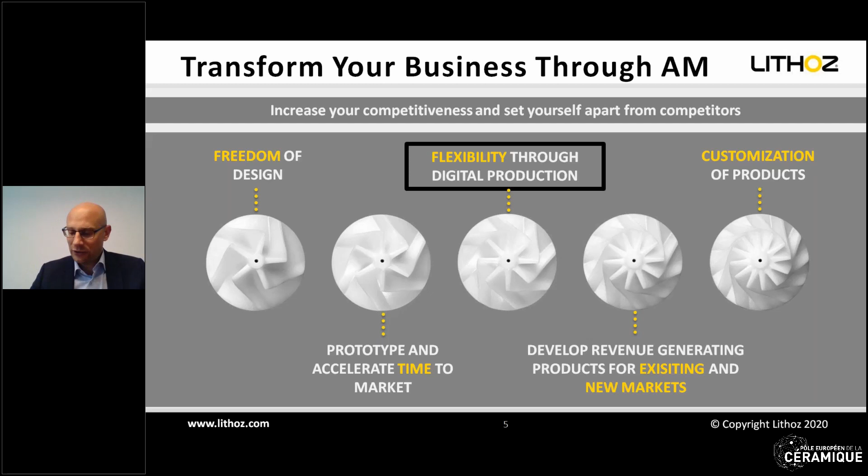When does it make sense to use additive manufacturing? I'll summarize a little bit what I've said, but go into more detail on these 3 effects, which I think are important for additive manufacturing. Here, what we see, of course, is well known.

Again, this is just a simplification. If we have injection molding, the prices go down immediately with the number of parts. So basically what we see, there's a break-even point, and additive manufacturing, in this simplification, is always the same price per part - it's not totally right, but should be okay for this. What we see on the left-hand side is additive manufacturing is more economical, and at a certain number of parts, injection molding becomes more economical. So this is what we currently see, that people are shifting from injection molding to additive manufacturing if the lot sizes are rather small. Sometimes they have to order parts for 3, 4, 5 years and cannot change anything, so they think they can do something with additive manufacturing.

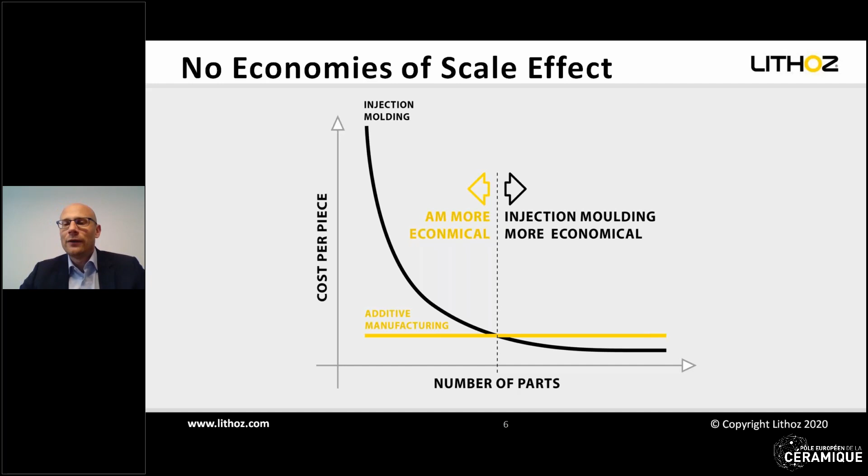And especially in the medical device industry, this has shown that it works out very well. Our customers are already in production with lot sizes of a couple of thousand up to more than 10,000 parts per year with this technology. So you see, additive manufacturing is already in serial production.

Another effect we see, I would call it the complexity for free effect - again, a simplification. We see with injection molding, the more complex a part gets, the more complex the tool will be, and hence the price goes up.

For additive manufacturing, complexity is more or less for free, so the complexity has no effect on the price. Again, we see here a break-even where there's a certain complexity where it makes sense to really use additive manufacturing also in large quantities. Of course, this is never independent from the lot size, but as a simplification, it shows that there is some area where additive manufacturing is even more economical once the complexity has come up.

So this is the easiest thing, these are those things which already are here. But much more interesting is this asymptote on the right-hand side of your screen, because what does it mean? A certain complexity cannot be produced by injection molding or by conventional forming technology, and this is actually the big blue ocean for additive manufacturing.

This is what I think the future of additive manufacturing holds, although it's hard to think about things which are not existing yet. But we already see these kind of things coming up, where you just add some functionality to the parts, and they give you much more value than the costs of the printing. So this is something which will be much more interesting in the future as well.

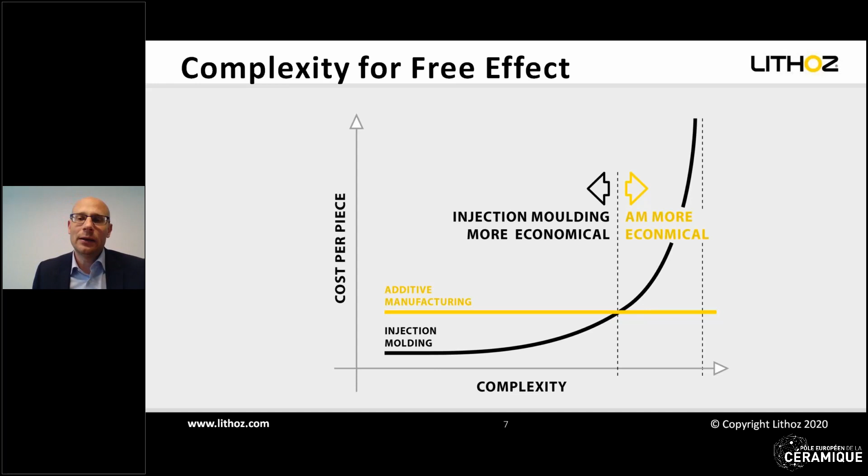And a very simple thing: size matters in additive manufacturing, and in that case, the smaller the better. Why is it better? Because we are working in parallel, so we can make all parts in parallel, and if you need to make it bigger, if the height is very, very long, it takes just a lot of time.

Here you see, for example, two casting cores which have been compared. One is a big one with 27 centimeters in height, and it takes about 27 hours to print this part. But if we go to the smaller cores, we can print 30 cores at once. They are, of course, also smaller in height, 73 millimeters, and the build time per part is then 14 minutes. So what you see is that the smaller the parts, the better it is suited for additive manufacturing, because here we have an effect which is different to conventional forming technologies.

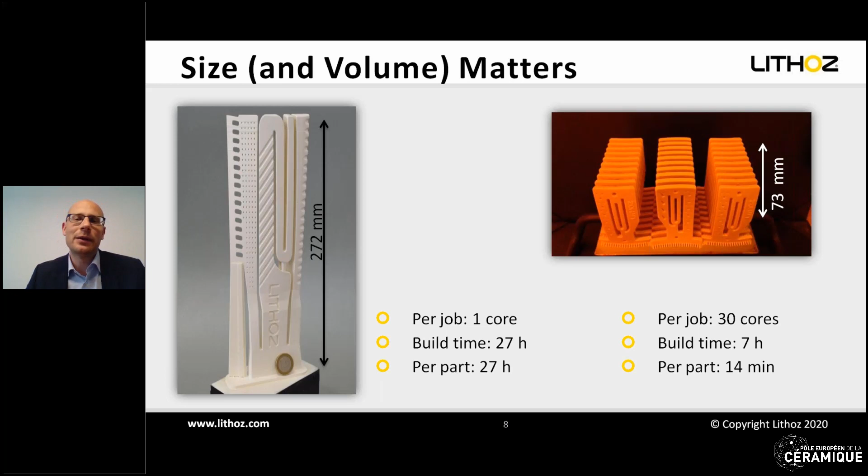Here, the less material you're using, the better it is for the price. So this was a general introduction into additive manufacturing, to give you a little bit of an idea of what you can do and where you should use it.

And now I want to step in to introduce you to our LCM technology. LCM stands for lithography-based ceramic manufacturing, which means basically that we are using light to structure. How does it work? Basically, for all those who are ceramics experts, and I think most of you are in this webinar, our technology is a two-step process.

So we start with a CAD design, then we print it, and usually then all, or most, of the additive manufacturing technologies are more or less finished. But since we are working with ceramics, we need a post-processing, a thermal post-processing, which means we need to debind and sinter the parts to achieve the final product. So this, again, is for me one of the reasons why we can achieve these good mechanical properties, because we have this two-stage approach, which is the normal way of treating ceramic parts.

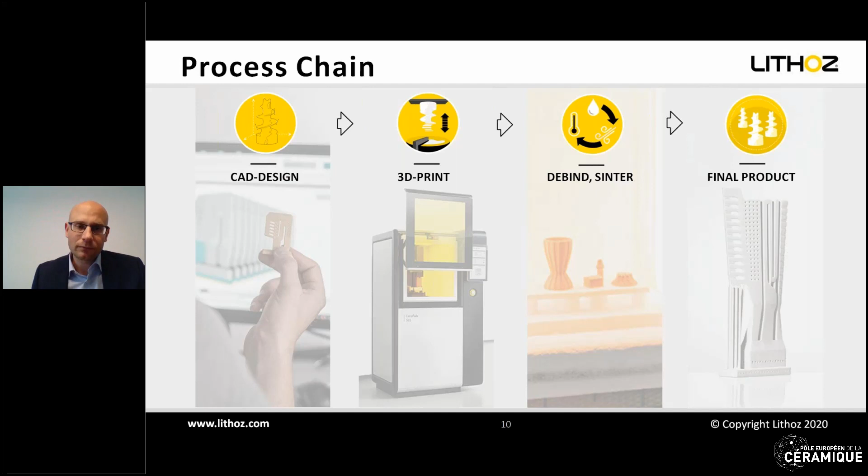How does the technology basically work? You can find a lot of explanation videos on YouTube or on our website, but let me show you very briefly how it works. On the left side, you see an insight into the machine. We have a ceramic material, a ceramic slurry in a vat, and the parts are drawn out of the vat.

As you can see on the schematic picture on the right hand, there is an optical system underneath the vat, and if you expose from underneath, the light hits the material. Where the light hits the material, it solidifies, and then you build up the part layer by layer, as with any conventional forming technology. The advantage of this upside-down approach is that you can make very, very fine details and very thin layers. So basically, when you build up from upside down, you have no contact between the blade and the part, and therefore it's unlikely that you destroy the part with the blade, which can happen if you expose sometimes from the top.

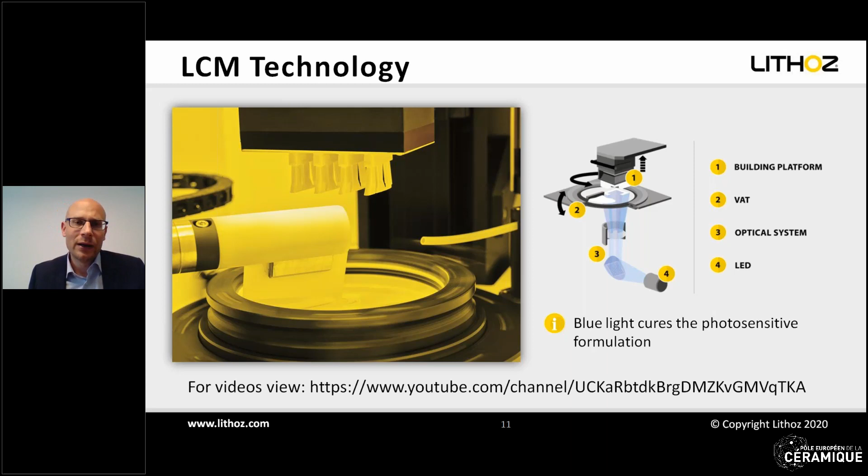This is clear - I don't know if you recognize this person in the back, but you see how it shrinks in this process. So, we start with the binder and the ceramic particles, then you burn off the binder, and then the part shrinks and gets the final ceramic properties. But this, as you can see here, is as with any conventional ceramic forming technology.

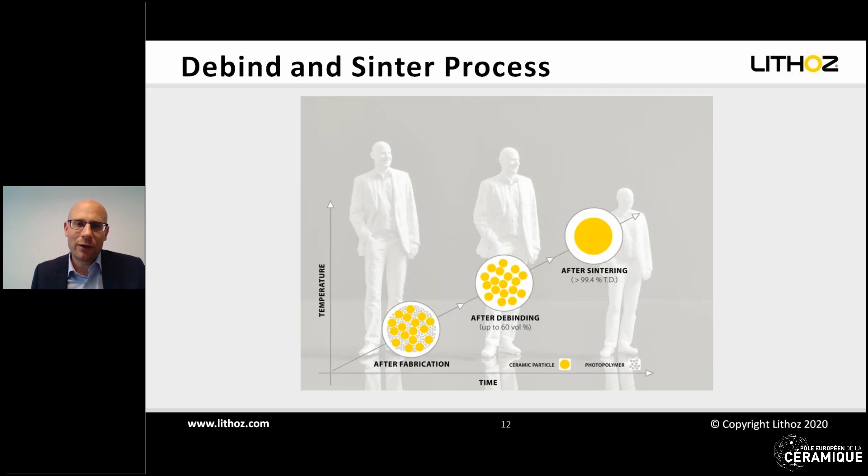Here you see our different systems which we provide at the moment. Our first generation was the CeraFab 7500. Here we have also a dental model, taking into account all those issues which come from medical application. Then the next generation is our CeraFab System, where we have different building envelopes, and it's also a modular design, so you can stack up to 4 machines into one unit to increase your productivity.

Because our approach is, and with all the people we talk to in additive manufacturing, from metals and from plastics, they all have the same opinion: to use multiple machines rather than one big machine, to keep the flexibility and to really make use of this parallel approach. I don't want to go into details about the differences between these machines - you can check it out on the internet, or contact us if you have any questions.

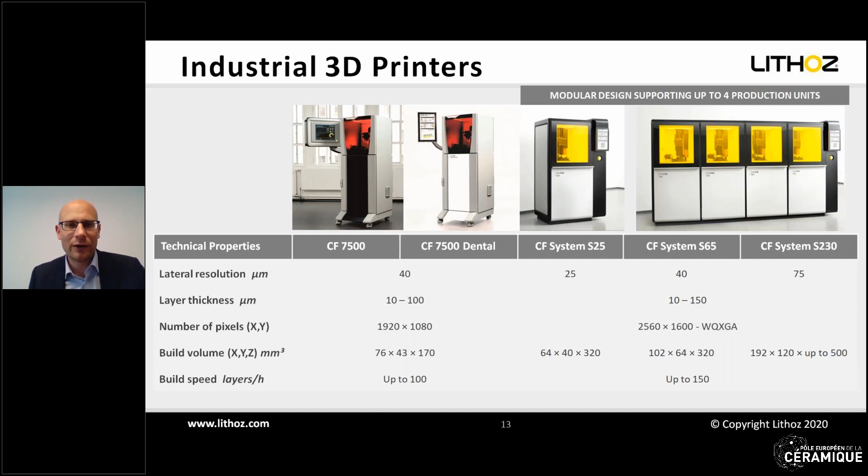What about productivity? Is additive manufacturing really capable of serial production? As I already told you, yes, it is. Our customers are already in serial production.

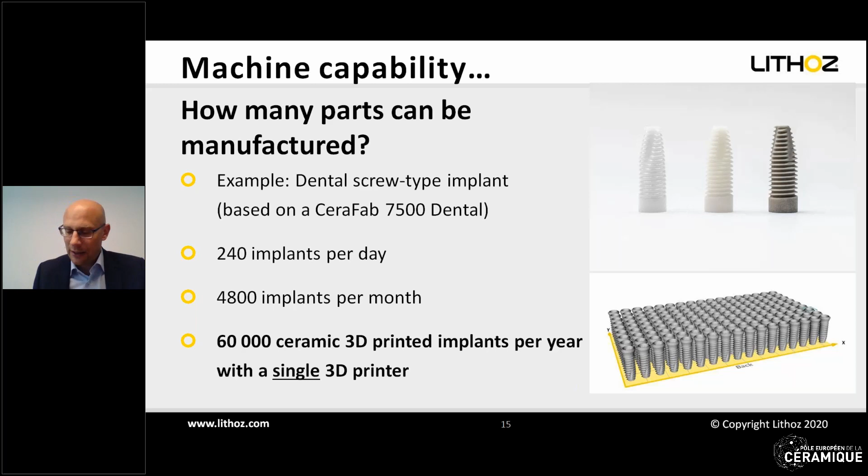Here I want to show you a part with dental implants. It's even on the small machine, so to say, on the CeraFab 7500 Dental. Here you can produce 240 implants per day, which means 60,000 implants per year with a single printer. And if you go to the next generation printer with the modular setup, the S65, and use it 4 times, you can make up to 600,000 implants per year with one single unit. So you see, again, small parts are good for additive manufacturing, and it's possible to really mass produce with these kinds of tools.

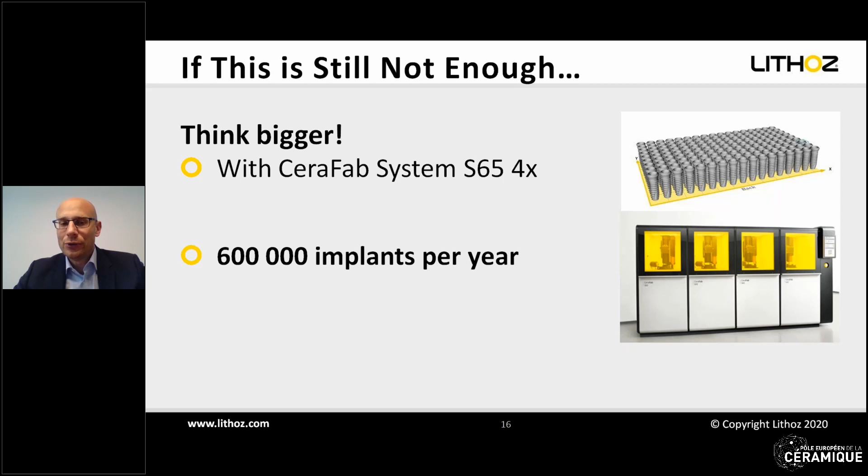One of the most important things in additive manufacturing is the materials, because, as I said, most of you are ceramic experts, so you know there are 3 main important issues for ceramics. First is quality, second is quality, and third is quality. It all depends on the quality of the ceramic parts, and therefore it's very important to check it out very well before you make any decision.

Basically, our philosophy is that we use the same powders as in conventional forming technology, which means we can use all sinterable materials. This is very important for us in terms of ceramic engineering or ceramic material science - we adapt the technology to the powder and not vice versa. So we take any powder provided by the customer or bought off the shelf to use in this process. The powder can range from 100 nanometers to 100 micrometers - 3 orders of magnitude what we can use in powders, or even more if necessary.

We currently do a lot of customer specific material development. This is where we are very well known for - customers providing material and we print the part.

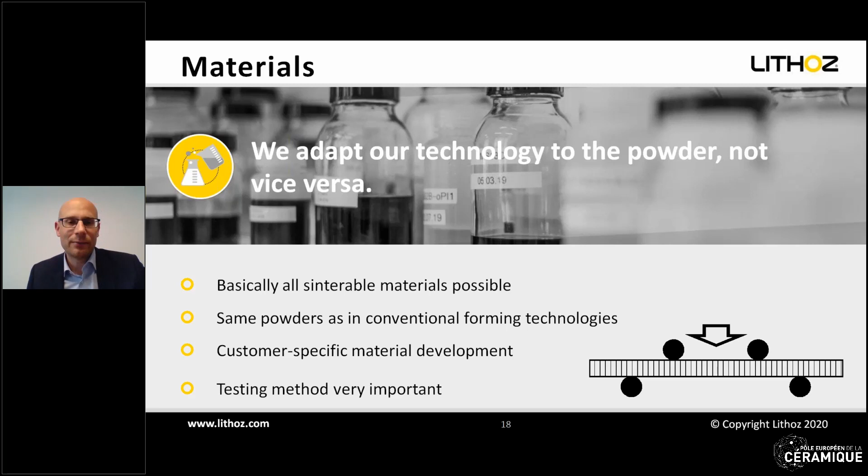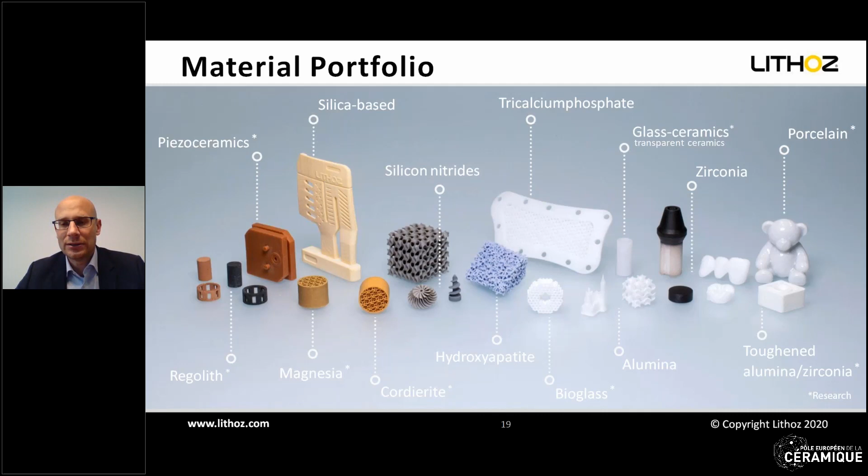So basically, as I said in the beginning, we can work on all ceramics basically, and the range is basically that you can use all ceramic parts.

Let me go into some details to show you what we can achieve with our standard products. For example, one of our first products was LithaLox HP 500, which is an alumina. It has a 4-point bending strength of more than 400 megapascals and density well above 99%. And very special, I think, is also the surface roughness. It's well below 1 micron.

The same is true for zirconia. So we have here 3-mole yttrium stabilized zirconia. Also 4-point bending strength, nearly 1000 megapascals. Theoretical density, nearly again 100%. And this shows you that these values are very similar, if not the same, as in conventional forming technology.

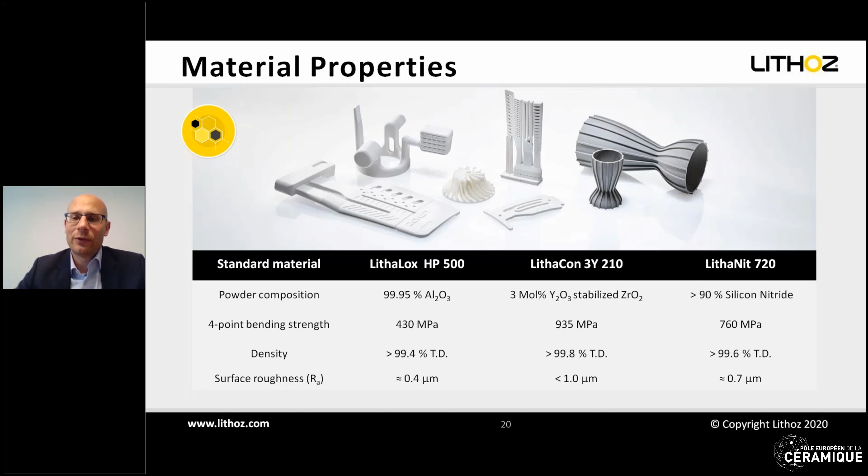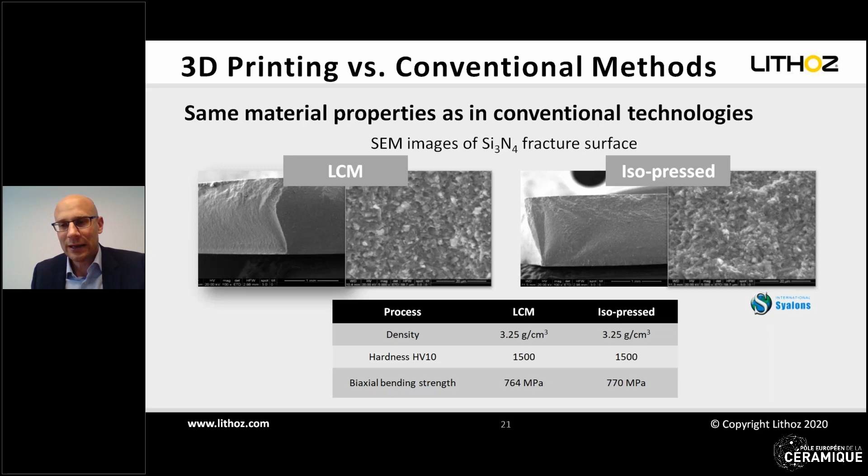One of the main things I would also like to stress is how can you see that you are really doing something good? Here I would propose to look into polycrystalline ceramics, to make them transparent. So basically, we could show here that this is the Champions League of ceramic processing.

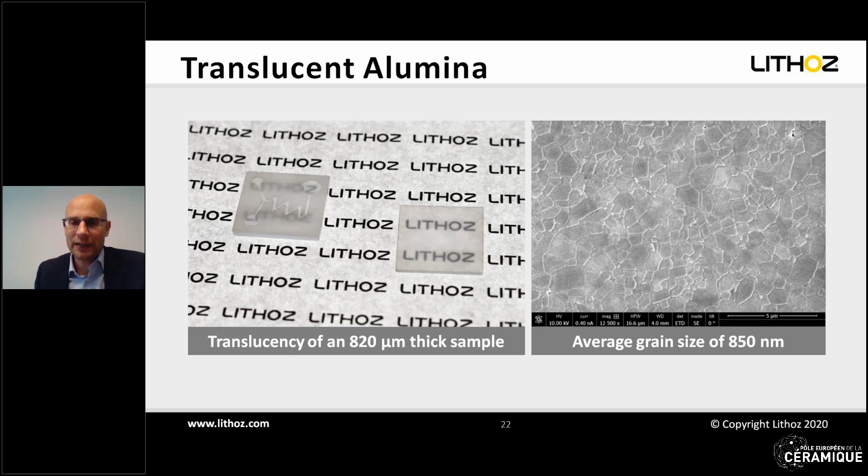Every crack, every air bubble, every problem at the grain boundaries, you would see here, and I call this always the Champions League of ceramics. So if you can do this, you can show that you are really playing in the world class here. You can also see here a micrograph from these hipped samples, and the average grain size is well below 1 micron.

Finally, let me also come to the industries and applications. I promised to show you some samples of where additive manufacturing in ceramics is already used, and I want to structure them in terms of industry. Of course, one of the main industries which we are working in is the medical industries.

As I said, all personal implants are unique parts, and therefore additive manufacturing is really the technology of choice here. We already have printers in Europe, in North and South America, as well as in Australia. So more or less all over the world, people or companies are making resorbable and non-resorbable implants.

Our customers have also already filed CE certification here in Europe for medical device class 3. This is the highest class, which means they are implanted into the body and are in contact with body fluid. This has already been issued by Europe, and also the FDA, the Food and Drug Administration in the USA, has already approved class 2a of our products there.

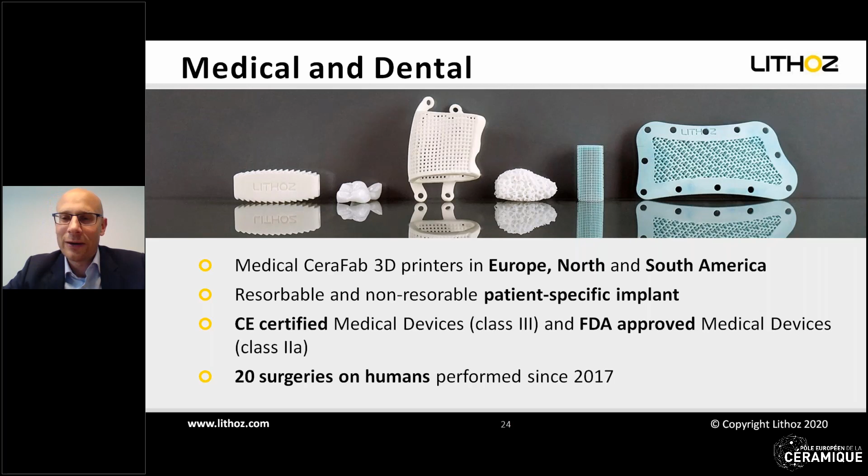I also told you that we're also doing dental parts. Here, of course, we can do different things. On the one hand, crowns and bridges and veneers, as you see here, but also implants, either of zirconia or even silicon nitride is possible.

So different things. Basically, what I think here with additive manufacturing is that one should find those applications where additive manufacturing can really give an added value, and this is especially true for these ultra thin veneers. You can make very, very thin veneers, with very accurate surface and geometry, especially on the occlusal surface, and this is not possible with milling. But here we have already done some tests and some trials.

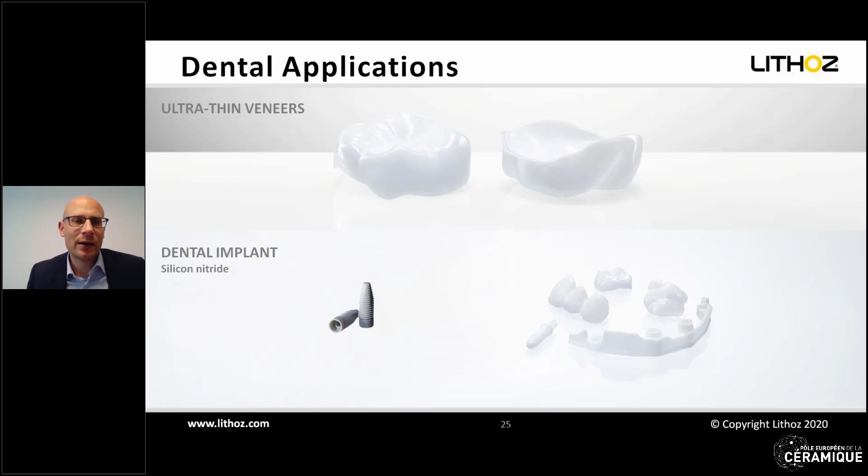Here I want to show you one of the examples where you can really make use of additive manufacturing. This has been done by one of our customers, Alumina 3D Systems in Germany. They were developing this kind of ring. It's for an etching and coating process in the semiconductor industry. In the past, it has been made out of titanium, and they had to change it quite often.

So first of all, they were making it of alumina, which makes it withstand this acidic environment, but they also developed a special nozzle design with additive manufacturing, and this is actually how additive manufacturing can be properly used, because they were decreasing the coating time by two-thirds. So instead of taking 3 minutes, it took 1 minute. This means they could increase productivity by 200%. So basically, when you had to buy 3 machines in the past, you can now buy just 1 machine by using this kind of coating process.

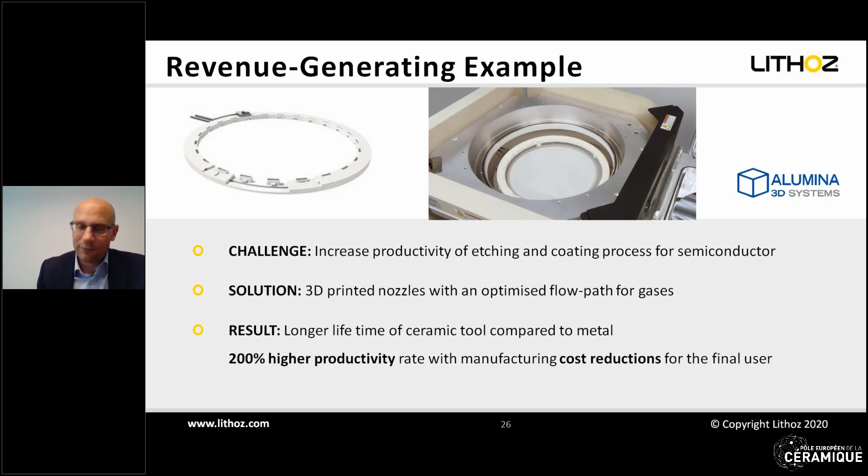And this is one of these examples, which I said in the beginning, where you can really add a lot of value to your customer or to the product, and then it is not so important how much this ring costs, because it saves 2 machines which are each worth over $1 million. So basically, the discussion about the prices of these rings is not the most important one, rather whether it can be supplied and whether it fulfills our requirements. I think this is one of the very good examples to show how additive manufacturing can be used.

One of the other markets which is very interesting for additive manufacturing is casting cores for turbine blades. As you maybe know, turbine blades are already cast, but they always want to increase the temperature in the burning chamber, which means they need to cool the turbine blades even better, because they are already exceeding the melting temperature of the metal. So they already have some things in place to cool the blade, using air cooling, and they need these casting cores.

The turbine blade industry already knows that the new generation of casting cores will have a multi-wall design, which means you cannot injection mold them anymore. So it's really a very complex part. When I look back, maybe 4 or 5 years ago, additive manufacturing was one of the possible solutions for solving this problem. Now my feeling is that it's one of the best candidates to be used for mass manufacturing these new generations of cores.

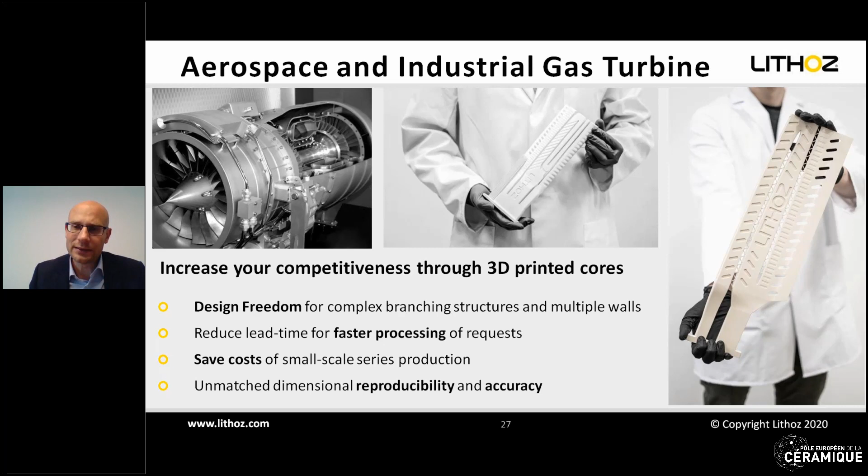So basically, we have about 40% in the technical ceramic markets, about 30% bioceramics, and 30% in gas turbines, and these are all growing fields. Sometimes we have to really make sure we can cope with all of this demand.

Let me sum up a little bit my presentation so we have enough time for questions. I think if you really want to use additive manufacturing, we are committed to your vision of innovation. So we see ourselves as partners, and we want to support you.

As I could show you right now, 3D printing can be used for all different kinds of ceramics. The biggest challenge is actually to re-educate engineers to make use of this new design freedom and think in these new ways, to think differently. This is one of the biggest challenges every engineer has, not only in ceramics, but also in metals and plastics.

This is what we currently see in this crisis, that you could increase your competitiveness in the market a lot, because the global supply chain is not as stable as it was supposed to be. With additive manufacturing, you could have a digital tool-less manufacturing technology, but also a production opportunity for small scale series and small lot sizes, where a tool investment is economically not feasible. Here we will see much more applications after this crisis in additive manufacturing.

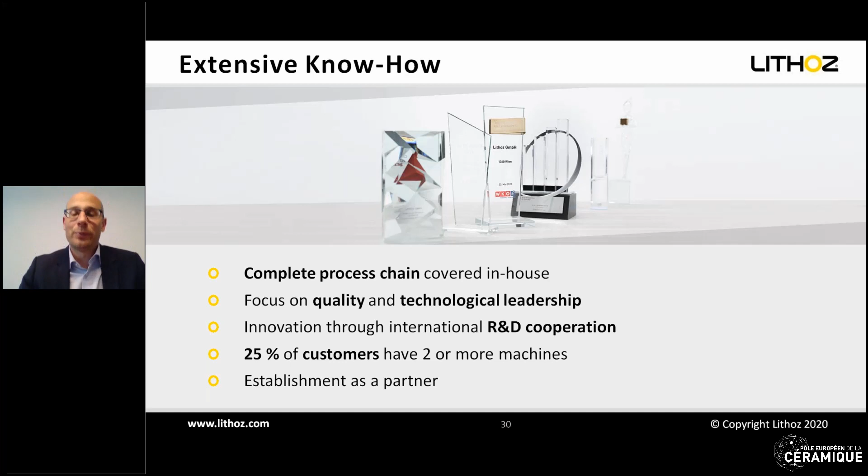But as you can understand, most industrial partners don't want to share their really good ongoing projects with the public, which means with their competition. But this is very important for us, to be seen as a partner and to support our customers.

Last but not least, let me end with a question: why is it important to deal with additive manufacturing? I still have 1 minute and I'm finished. Why is it important to deal with additive manufacturing?

We have seen now a lot of applications, a lot of ideas, a lot of things. Everything looks fine, but why can I not use it directly in my business? I think it's very similar to what we have seen in the past with what people were thinking about computers. Here we have Ken Olsen, the founder and president of Digital Equipment Corporation, one of those who were introducing computers.

He said at this time, there is no reason why anyone would want a computer in their home. Imagine or think how many computers do you have right now? One mobile phone, a computer, in your car, a computer, everywhere. So basically, this is the difficult thing, to look from now into the future and try to find applications where additive manufacturing can be used. They had it 50 years ago, the very same problems, and now we cannot live without computers.

And I think this will be also very true for additive manufacturing, and we already see it here.